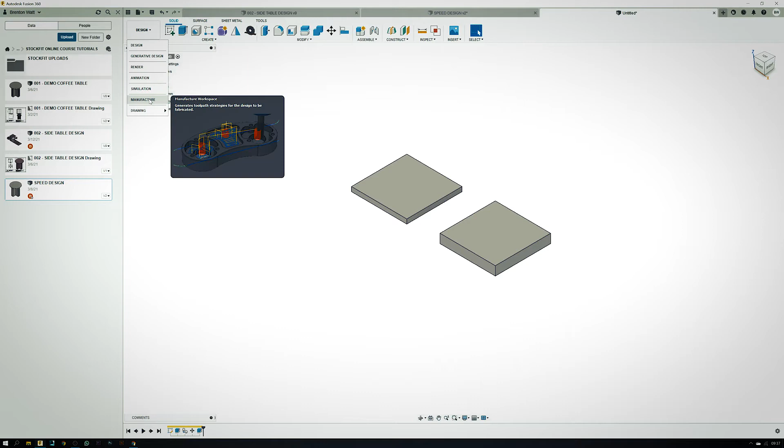So to give you some idea, we're going to go into the manufacturing tab, and we're going to hit the setup folder. Now I've got my default setup done at 1830 by 2760, which is a standard 6x9 board. We've got a 16mm thickness, and for this exercise we're going to select that item, the 16mm board. You'll notice that we don't have any errors here.

Offsets can be anything. I've got mine default at 4, but you can make it a little bit more if you like. So we just hit the OK button.

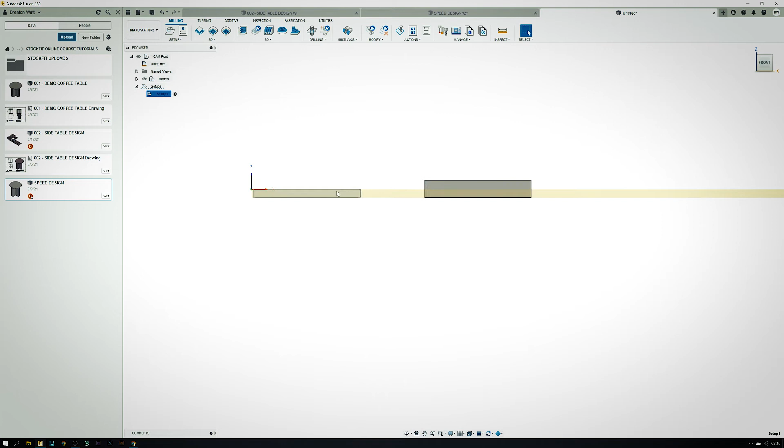So during that setup, you'll see this is a full 6x9 board, and you can see from the side that it's a 16mm thickness, which means that the 32mm board won't fit.

Anything relating to the machining of this panel - if I chose this panel alongside this one in the setup, and I stick to the 16mm height, you're going to get these warning messages, which basically says your material is 16mm thick, but the model itself is thicker than your material, which means it's an issue.

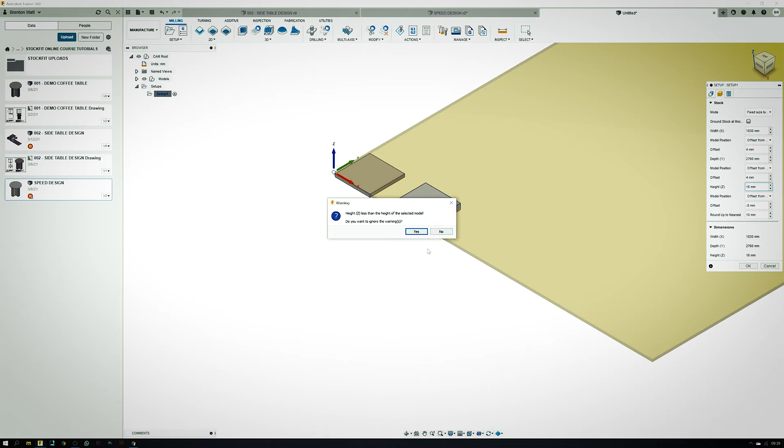So please keep in mind that your stock's got to match your material thickness. You can't design something at 32mm and try to machine it out of 16mm, which is kind of obvious, but you might get those errors and not realize why.

Now, this is based on a full sheet size. So what I'll do for now is I'll just create another setup of this item again.

But in this case, I will say, okay, let's say we've got a 1.2 meter by 2.4 meter 16mm board - again, a smaller sheet size than that. But you get the idea - that would be a normal sheet size.

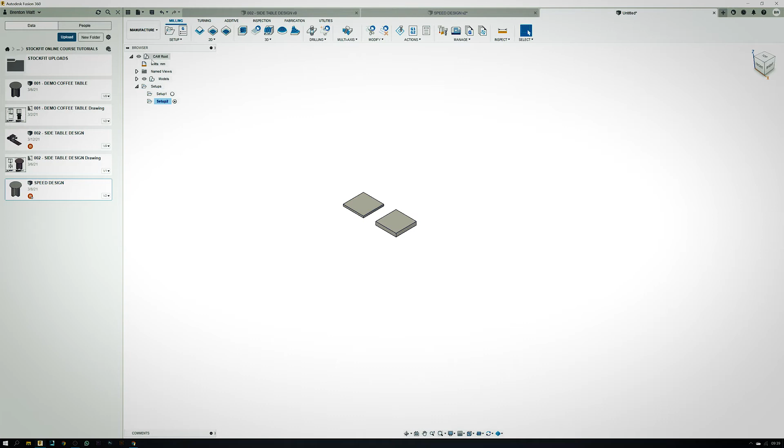Now, the other option would be to do an additional setup where you can actually select your model, and then on your tab say, instead of a fixed size box, which means it's preset or prefabricated - a full sheet material - you can say it's a relative size box, which is basically sized to the size of your model itself that you want to machine.

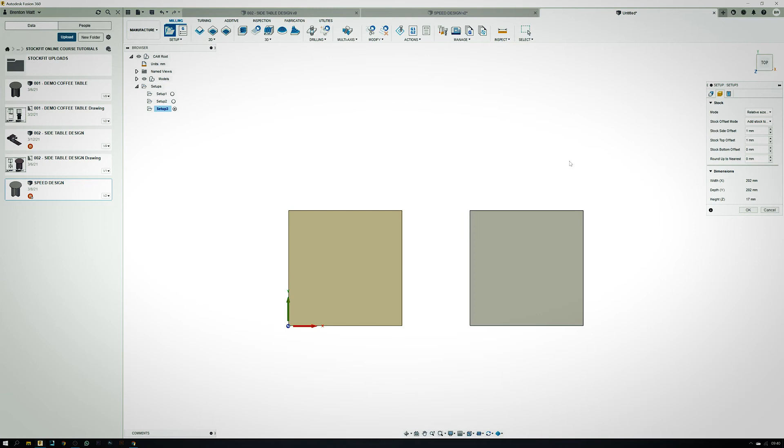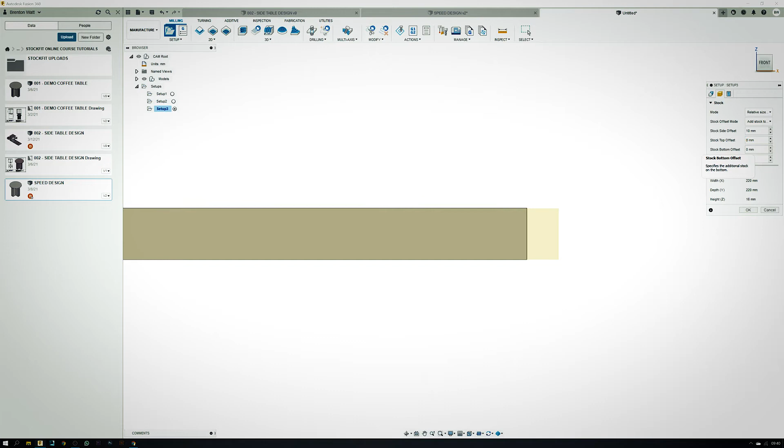And we can do offsets here. You've got a top offset and a side offset. So we just added a 10mm side offset for now. The top offset - it looks like it's 1mm over here, yes. So we can just put that on a 0 to make sure that it fits nicely. And we hit the OK button.

So now we've got 3 different setups basically - got that one, which is a full sheet, a smaller sheet, and just the actual piece of material that we want to do. Now, that's just the basic setup.

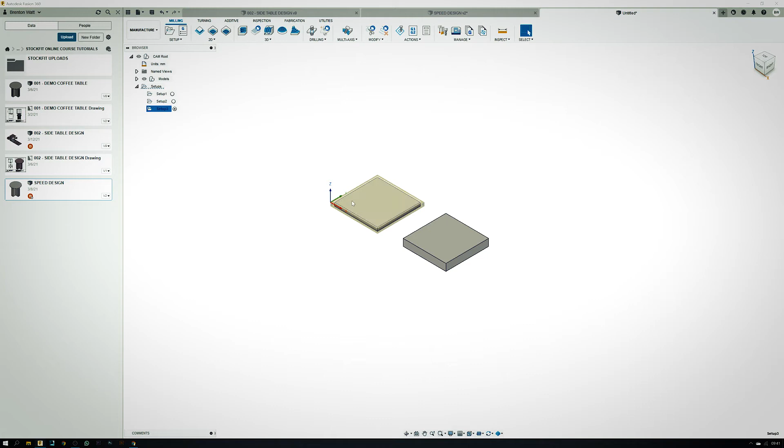Now you can see that the y-axis goes from left to right, top left to bottom right in this case, and then the x is this way across, and z is obviously up and down. So make sure that you match the y this way, the x this way, and the z up that way.

Basically, the way that I would do that usually is just hit home. You've got front and right on the cube over here, which means that your x and y axis is in the right direction.

Technically, you could set this up to be whichever direction you want, but I'm just going to show you quickly. We've set up the 0 point to be at the left bottom, so when you look at it from the top, we've got the 0 point at the left bottom of the actual model. But you could change the 0 point to anywhere you like, actually.

So the machine will create its G code based on this being set as the starting point. You'll notice that while we're setting up the machine, I bring the router bit down and just make it touch the board, and I set on the machine 0, 0, 0 point - Z, X and Y all set to 0 when it touches this corner there.

Then when we create the G code, it basically says this is our starting point over here, and we'll work from this point, moving towards wherever we need to go in order to cut whatever it is that we need to cut. So if you create a 0 point, for argument's sake, on the right top corner over here, the machine will want to move this way.

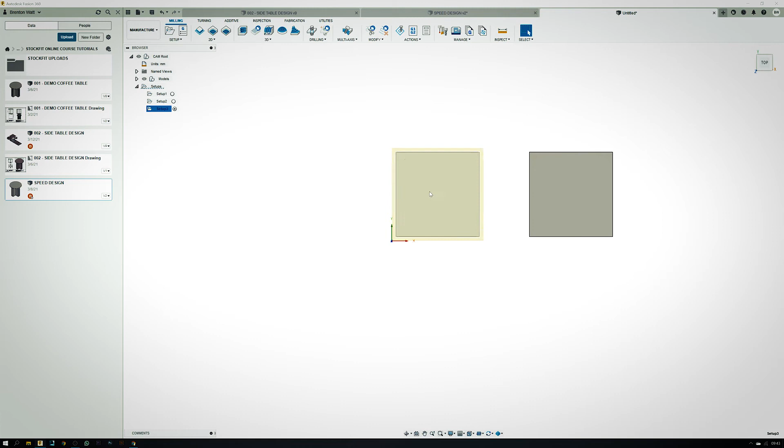The machine will want to do it, but your limiting switches or machine limits will kick in and throw out an error. Because the first thing the machine's going to assume is that there's plenty of space and it can go left as far as it needs to and go as far back and forward as needs to be. So the machine doesn't know its own limitations regarding the X and Y. That's why there are limit switches on the gantry, so that when the machine reaches its maximum point before it causes damage, it will actually stop.

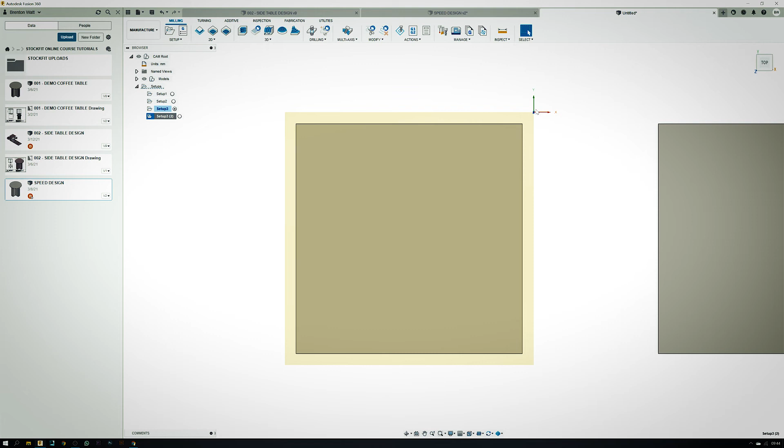So to set up the 0 point, we could just duplicate this for a second, and then we can select that point over there, and we can still hit OK. Now what will happen is, on this file, if I set the 0 point there, I've got to make sure that there's enough space on the left and towards the front of the material or of the machine to machine this piece of material.

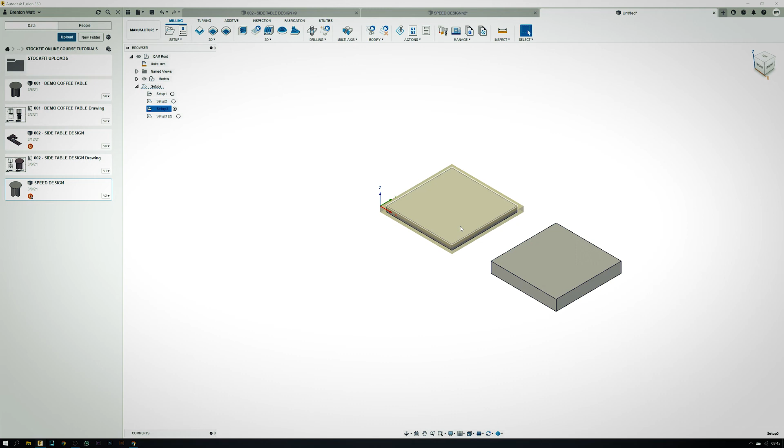So that one is a top right 0 point, and this one is a bottom left. Now we use the bottom left 0 point on all our designs. So basically, if we load a machine, we load the full sheet as we would here, and we 0 pointed from here.

So we set up the machine, we 0 pointed over here, and we hit play, and then we know that the machine can move back on the gantry 3 meters, this is 2.7 meters, so the gantry can move all the way 2.7 meters this way, and it can move 1.8 meters that way before it reaches the limit of the machine.

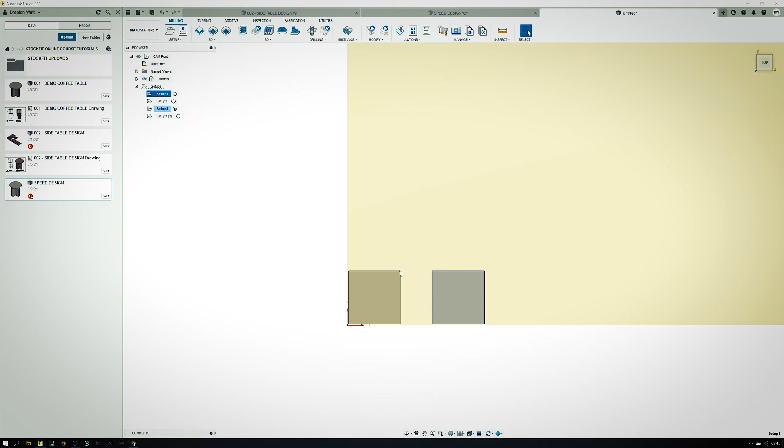So to put things into perspective, let's say this yellow spot is the machine's actual bed. If I wanted to machine this block out from that corner over there, I could do it as long as the 0 point is set up to start over here, so that this part of material actually fits in. You don't want the machine to move this way and hit the limit switch, or move that way and hit the limit switch and then it says, okay, it can't machine this part.

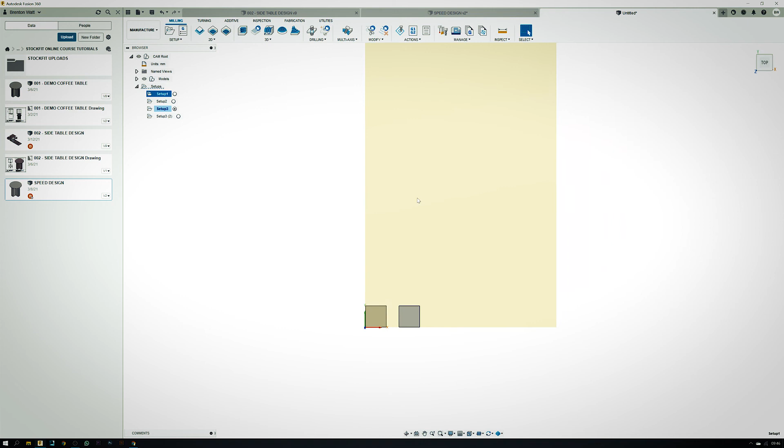I hope that makes sense. I think for the purpose of the exercise, let's just stick to the 0 point on the left top, left bottom, and then on the top of the actual material over here. That works best for us, and I think for most CNC machines that would be completely efficient.

But if your machine is for some reason flipped the other way around, let's say your control unit's on the right hand side and it's easier to zero it on the right bottom, then basically you could do that by simply selecting your model, and selecting the point that you want to have your 0 point selected at.

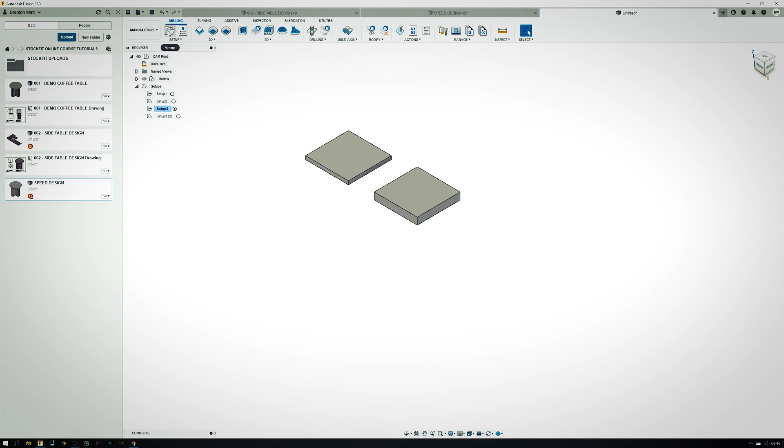Okay, so that's based on a 16mm board. So for our next setup, we will do a 32mm board. You can just select this one on the models, and then we'll just have to turn this into 32mm and hit OK. Same thing again.

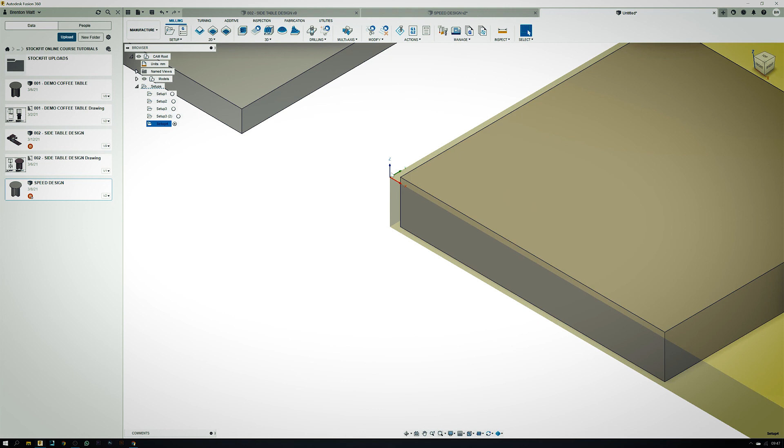We've got our machine set up, and that's basically it. We've got a nice 0 point over here, and that part is nicely worked in there, and there we go. So I think this makes perfect sense. You've got to make sure that you match the thickness of your material that you're going to be using.

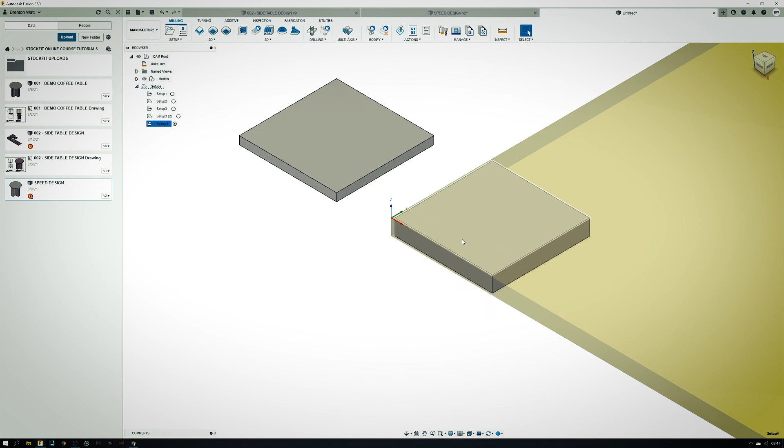Now, if you were going to use a 36mm board, or let's say a 32mm board, but you want to do something a little bit thinner, like 30mm thick, then you can still do that. What will happen is, let's say we've got material that is 40mm thick.

You'll notice that the material is a lot thicker now, and there are a lot of advanced settings that you can do. You can offset from the bottom. I just want to see what the model offset is.

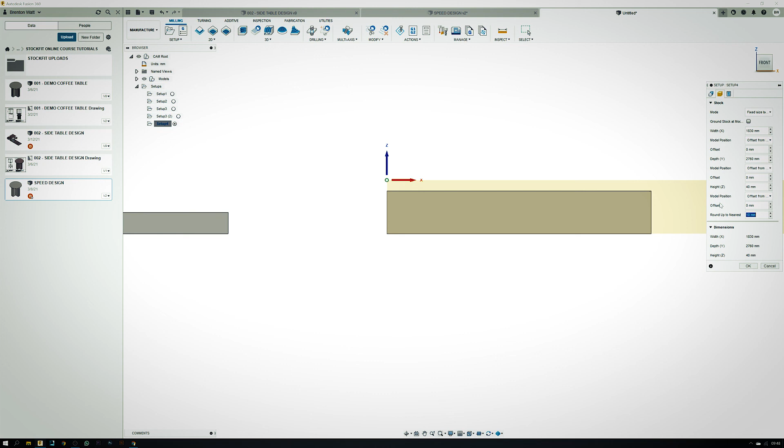Should we put this on 0 for now? 0 for now, and 0 for now. There we go, that's exactly the look I wanted to get. So just set up 0, 0, 0 and say OK.

All right, so we've got all these 0 offsets. Now you'll notice that the stock line is higher than this. So what the machine is going to assume is that this top line needs to be machined off. So the way that you would do that is, if you set up your path, you'll have to do a face clearance like this.

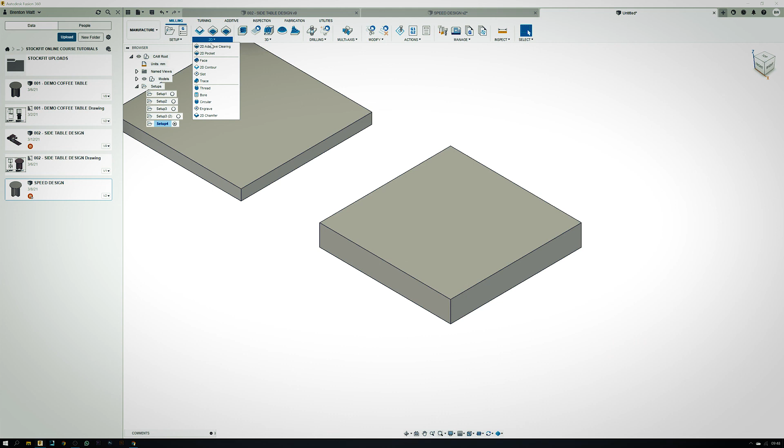Simply select that face and hit the OK button, select the tool that you want to use. Do this very quickly, and then the machine will take the stock and create a sort of pass to just take off the entire top line of the stock.

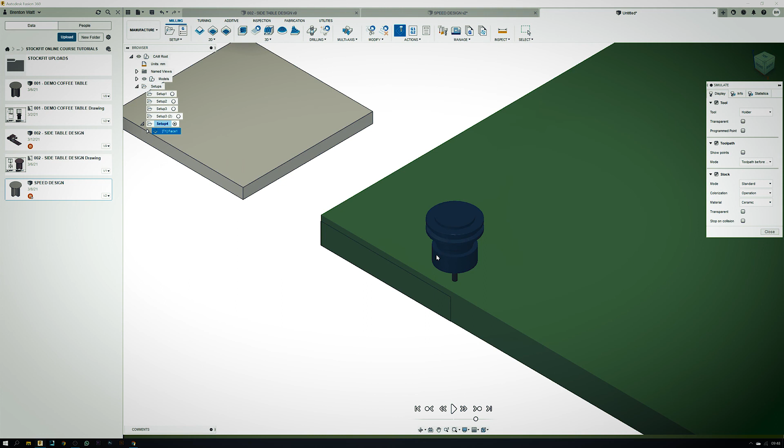So I'm going to hit play and show you, give you an idea, it'll take your material from 40mm down to 32mm on the design. So that's if you're using thicker stock.

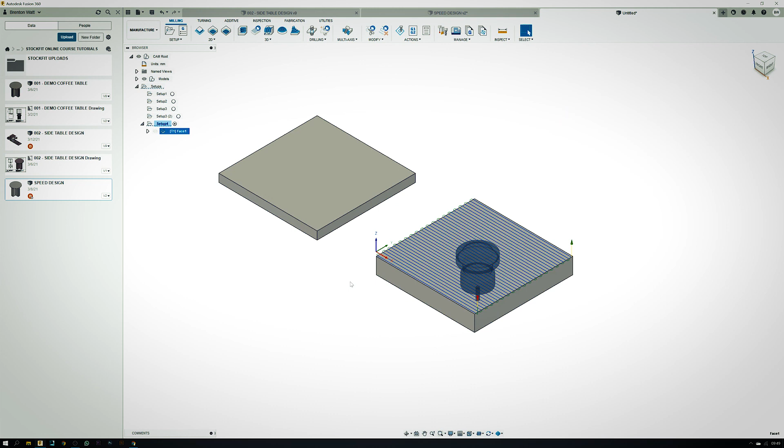So if, for argument's sake, you are using 18mm MDF instead of 16mm, and you want to do the Stockfit items, then you could always just plane off the top face of it to get it down to the thickness that you want. So it's just planing it off.

But yeah, basically that is the 0 point. I hope it makes perfect sense. The next step, we'll go into our different paths or cut lines.